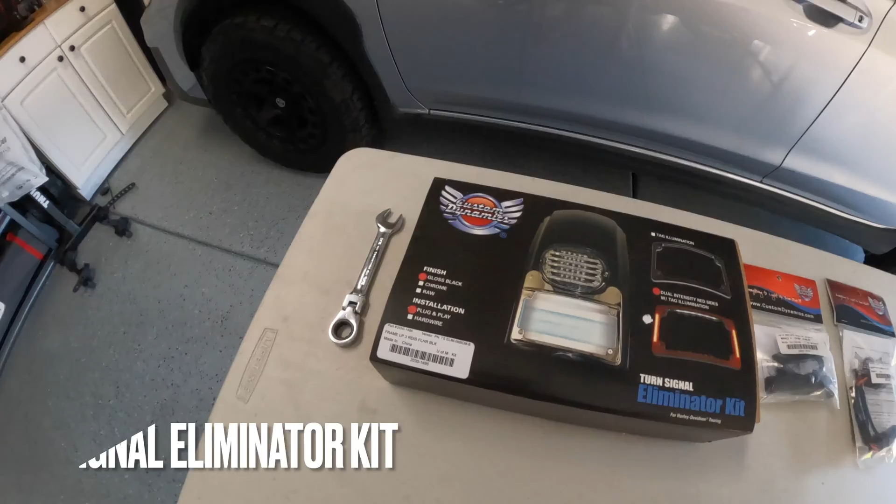This kit includes the frame, 6 white LEDs for plate illumination, plus turn, run, and brake functionality. It comes in gloss black and utilizes stock bolt holes for mounting. All the hardware is included, plus an LED lifetime warranty, which is pretty great.

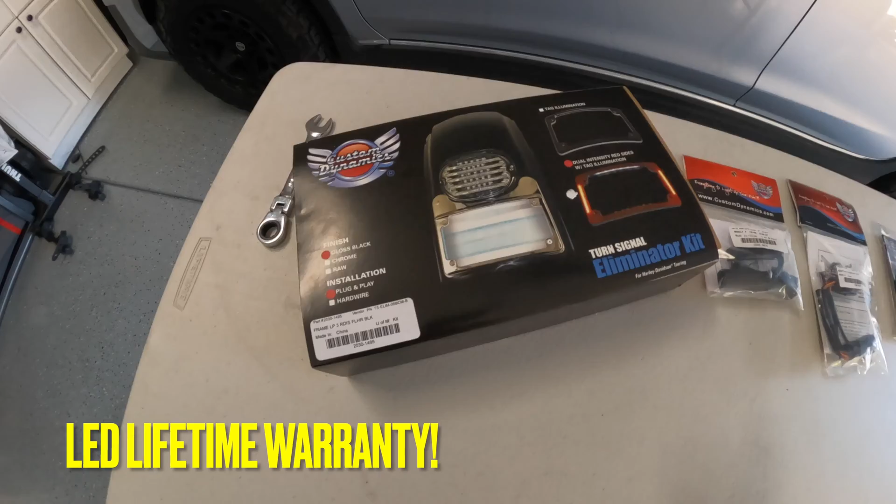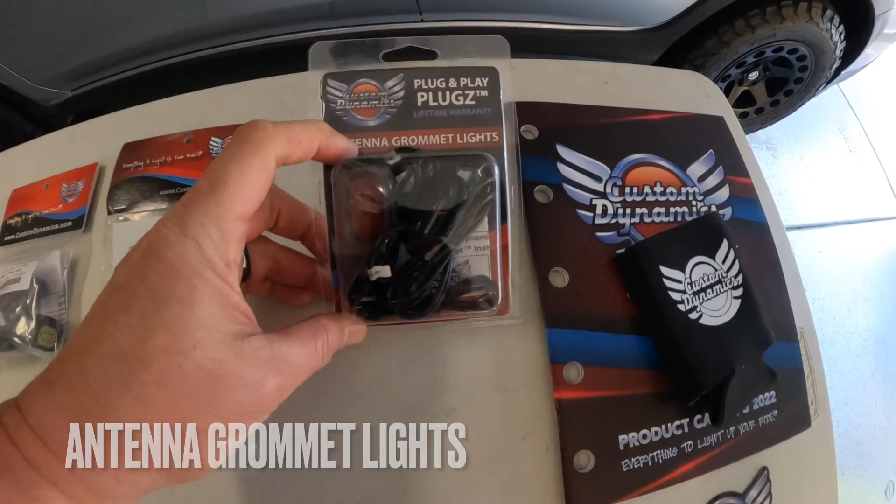To make this kit work, we have to buy a load adapter, and a run, brake, turn adapter. I also have the antenna grommet lights, which actually fit into the antenna holes in the rear fascia, hanging on either side of the rear fender. You just take out the stock rubber plugs, and those lights fit right into those holes. That should be a real nice clean look. I'm looking forward to seeing how it works out.

Here's a shot of the stock turn signal bar, and for comparison purposes we'll do some lighting tests so you can see. These aren't stock bulbs - I actually replaced these with aftermarket Custom Dynamics bulbs. Very bright, very effective, but we're gonna get rid of them in favor of a new setup.

In the interest of time, I'll speed up the unboxing process. Basically what we have inside the box is the turn signal eliminator backplate, the BCM-Y harness, the license plate frame with mounting screws included, mounting bolts, and a bunch of zip ties.

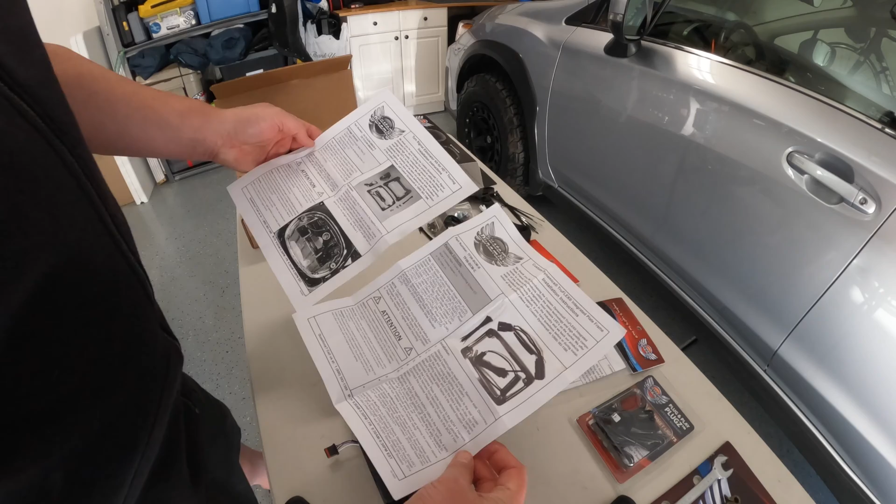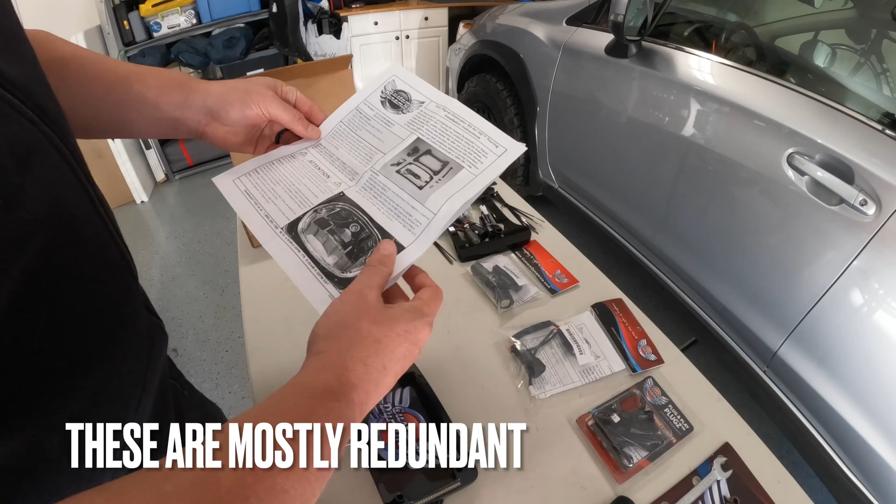With all of the parts included on the table in front of you, I have no less than 5 pages of instructions. So if I can, I'll try to break this down for you guys and make it a lot easier in case you want to do a similar setup for your bike.

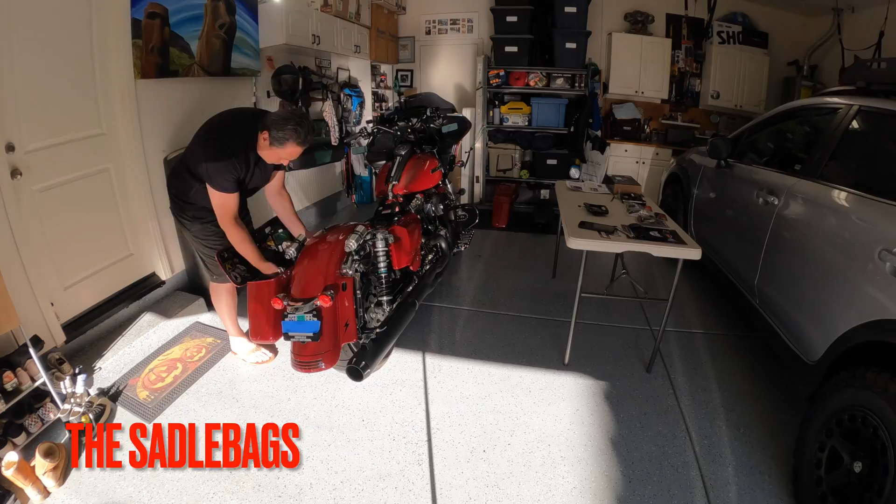For step 1, we're going to remove the seat, the saddlebags, and the side covers. For the next part of step 1, we're going to disconnect the negative battery cable from the battery. It's a little tough to get to because there's a lot of stuff stacked on top of it.

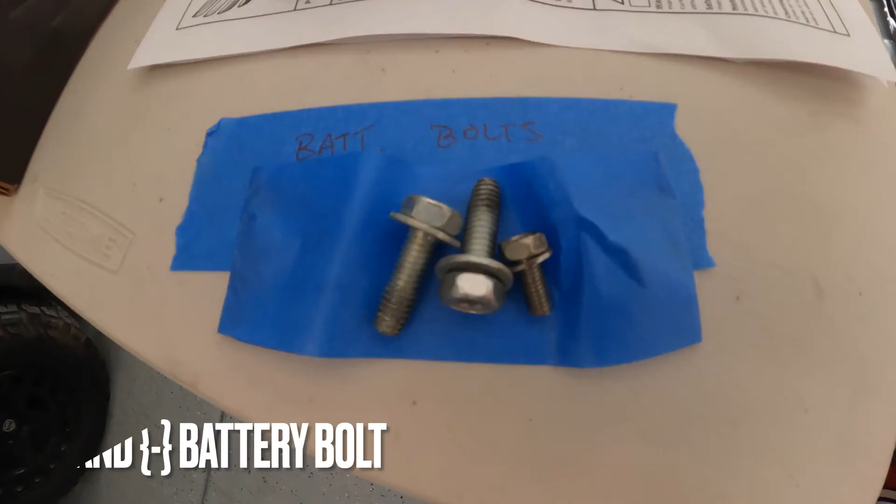Step 2: remove 2 screws on either side of the taillight, unplug the taillight connector from the taillight base, and remove the taillight.

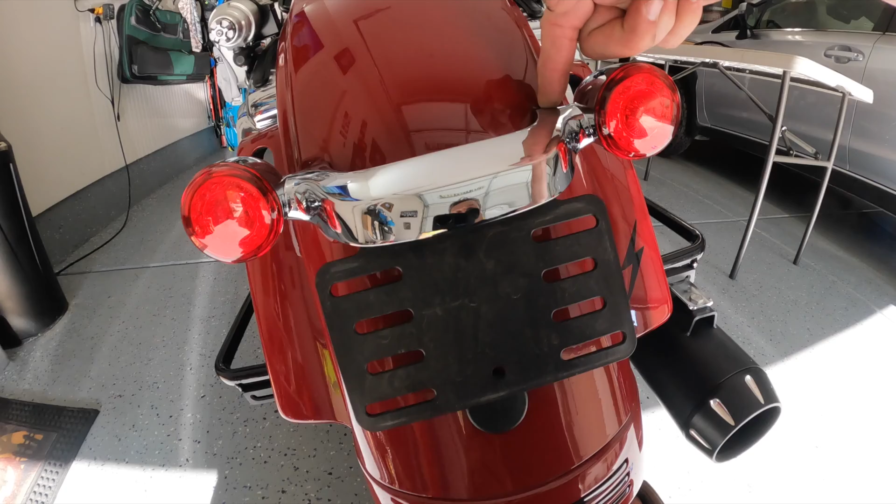There's 2 bolts holding the turn signal bar onto the fender, and there's about that much space between the rear tire and the fender. You've got to get your hand all the way up there with a wrench to undo it. Let's see if we can't get those off.

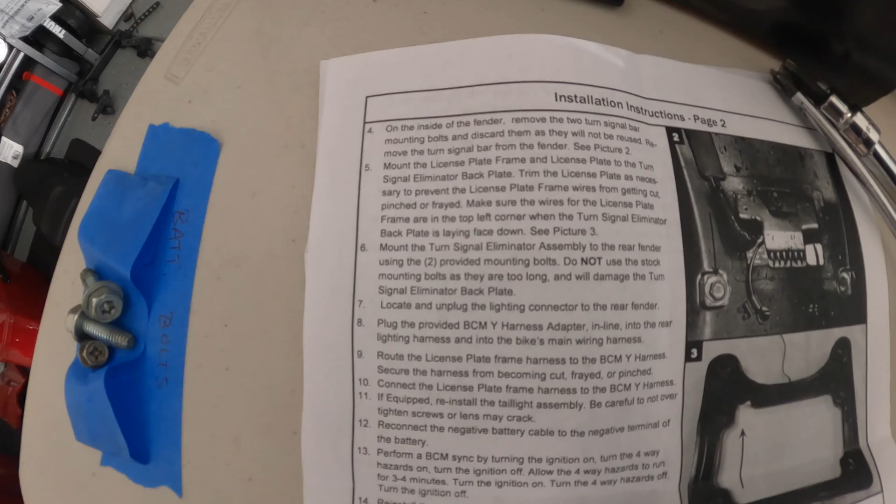All right, skipping to step number 4. On the inside of the fender, remove the 2 turn signal bar mounting bolts and discard them, as they will not be reused. I don't have a lot of range of motion with my hand in between the fender and the wheel, so we're just going to have to do a bunch of small turns. There she comes.

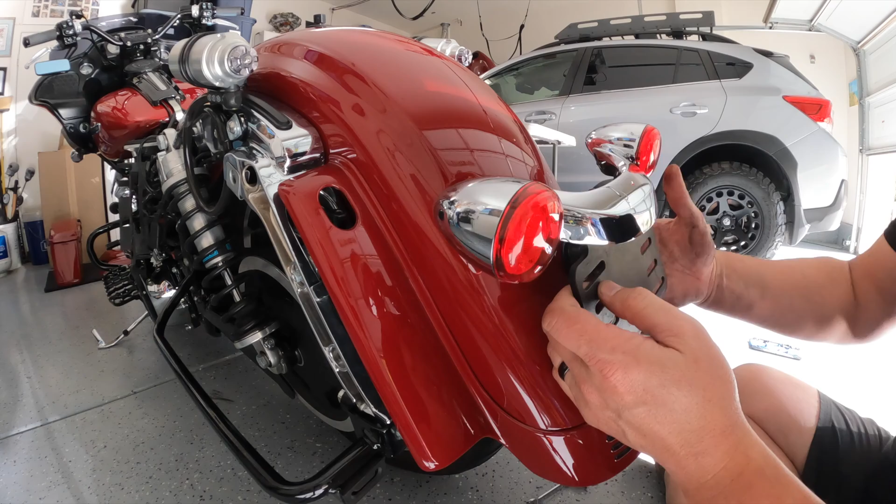Now we got those 2 bolts off, and it's now off. I just have to disconnect the electrical. I'm going to clean this up - I already like it better. So we're underneath the fender, let me get a little shot of what it looks like.

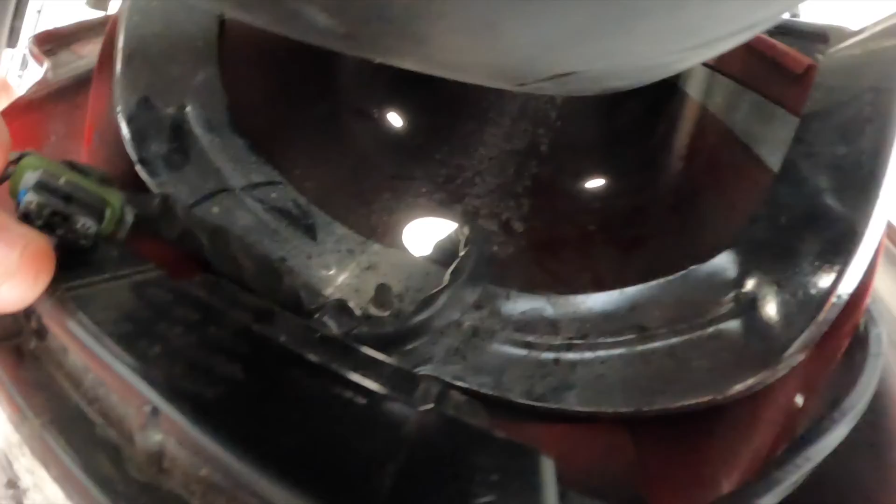This is the wiring harness that comes out from under the fender and connects to the turn signal bar. I just unplugged it with this connector here, but it's still kept in place with this bolt. The wire is managed up against the fender so it doesn't hit the wheel, so we've got to get that off too.

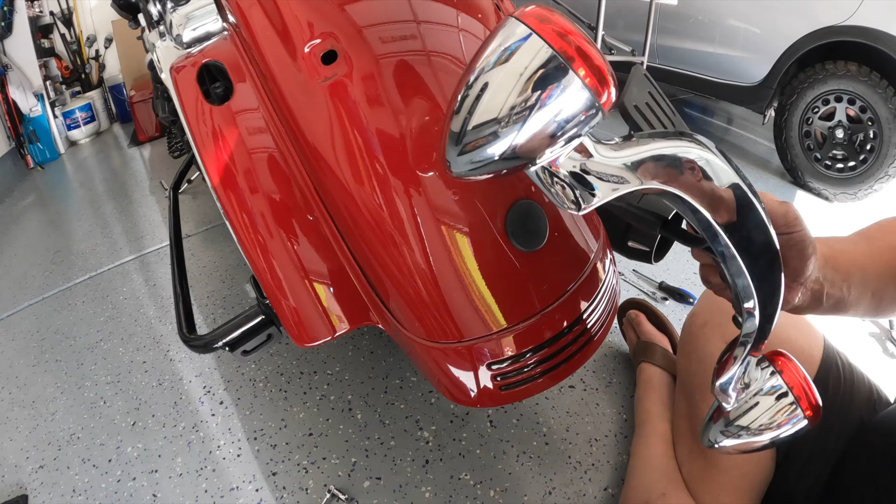This little bolt was kind of a pain to get to because there's just no room back there. It's a 7/16 bolt, and now that that's off, this guy's free. Don't scratch my paint, don't scratch my paint, don't scratch my paint. And there we go, it's out.

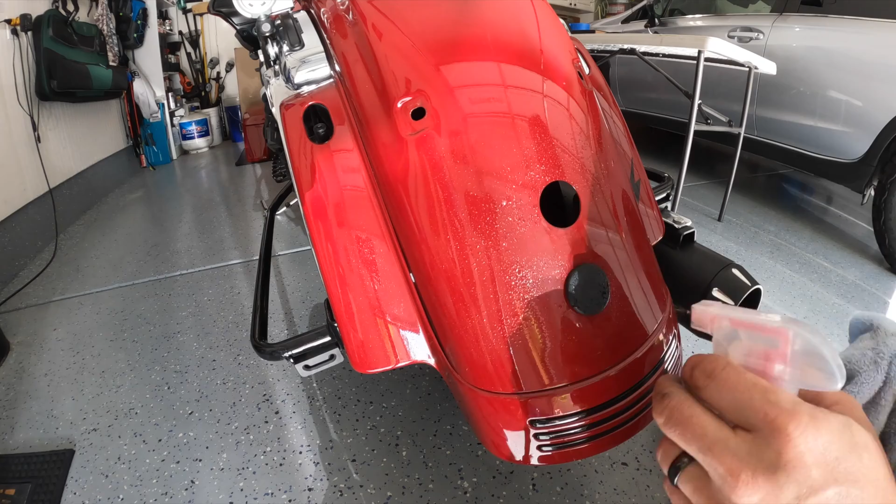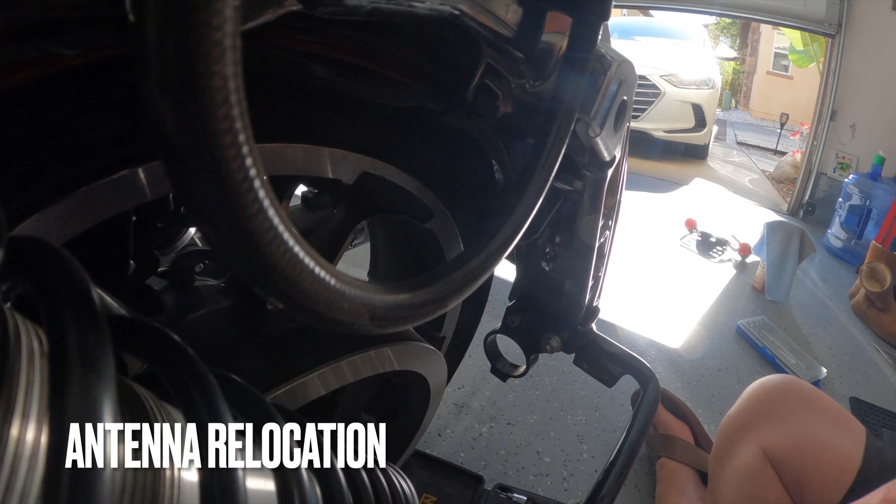A little dirty - I'm not gonna rub the dirt into my paint, I'm just gonna lightly wipe it off. Nice and clean. So the next thing I'm gonna do before I continue on with the instructions is figure out what I'm gonna do with this antenna.

This is the antenna mount. It's held on by a 3/16 Allen head bolt. I don't really listen to the radio all that much, but I kind of don't want to lose the functionality of it. I think a lot of guys who do this turn signal delete just plug it, but I don't think I want to do that. I'm not really sure yet how I'm going to reposition this, but let's see what's possible.

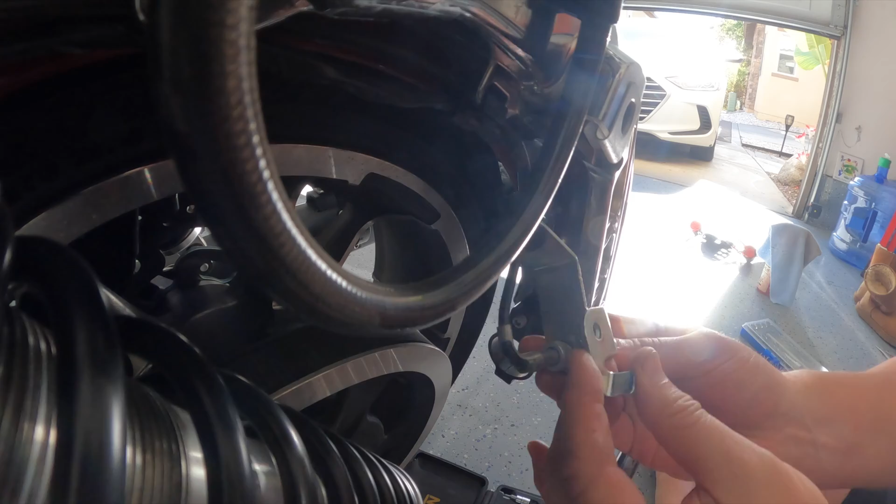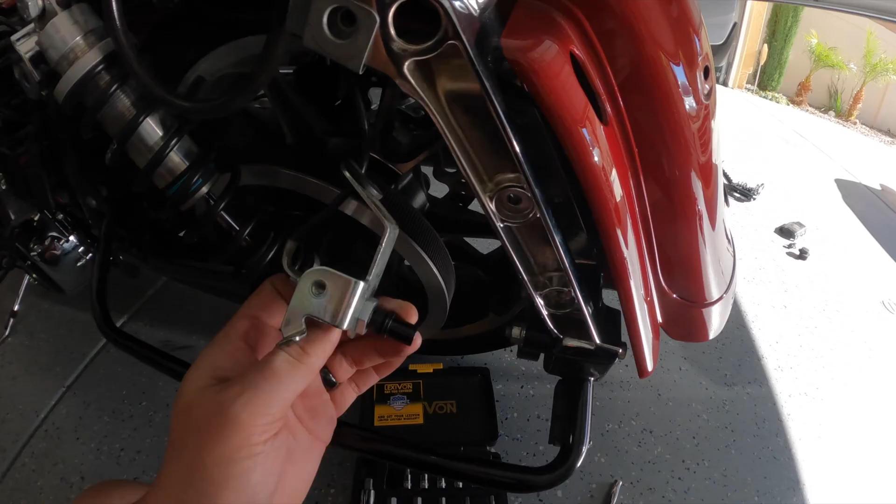There he is. I wonder if I just flip it, because I'm going to need this space here for my grommet light, and I need all that room behind it to mount the wires and the light housing. Obviously I don't want it near the pulley or the wheel. Let's see what we can do here. Okay, I think we're done - all I did was flip it around.

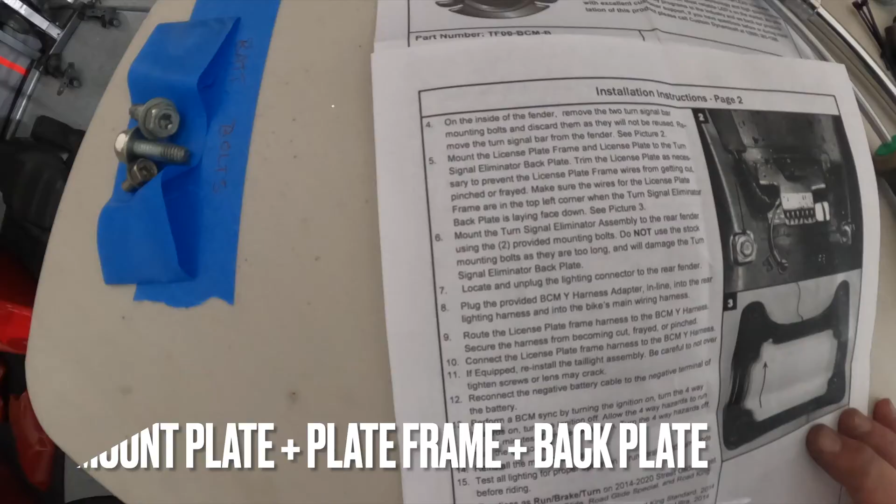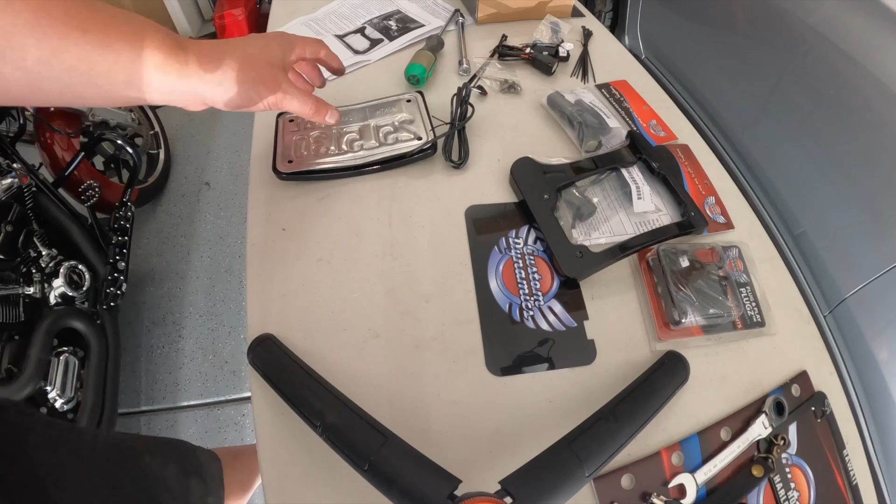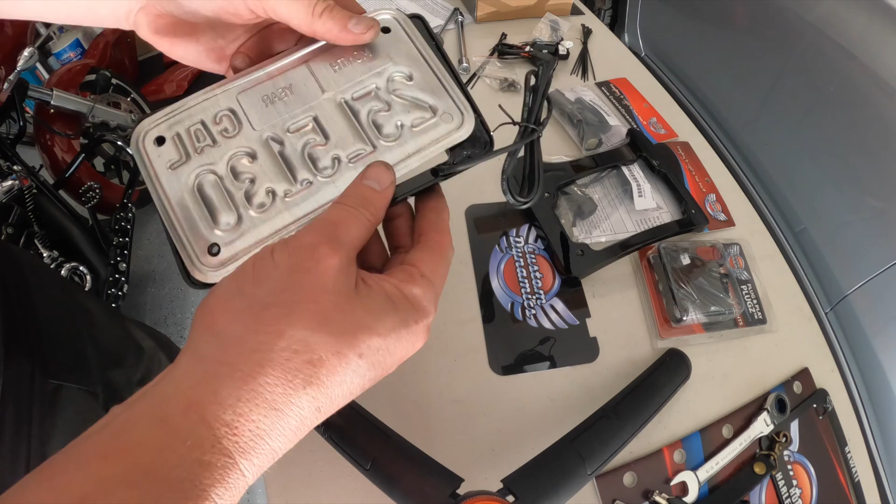Step 5: Mount the license plate frame and license plate to the turn signal eliminator back plate. Trim the license plate as necessary to prevent the license plate wires from getting out. So it does say to trim the plate, because I don't want the sharp edge of the plate to have friction up against that wire half hole right there, so that the plate can fit in there flush.

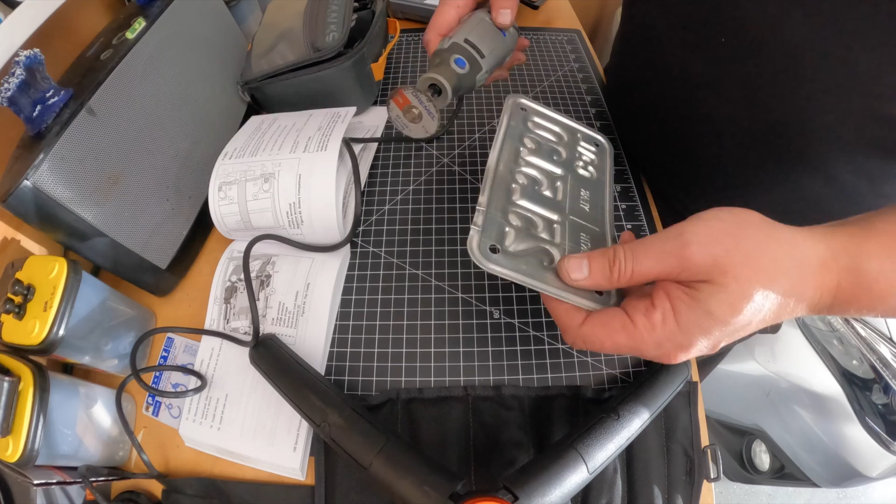Okay, got my protective eyewear. I'm just going to trim off a little piece of this plate, and bend this 90 degrees to make it a little easier to cut.

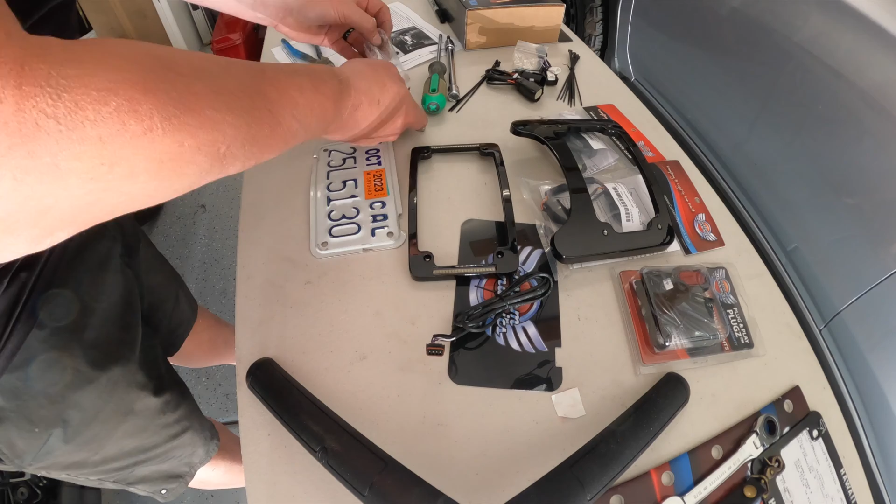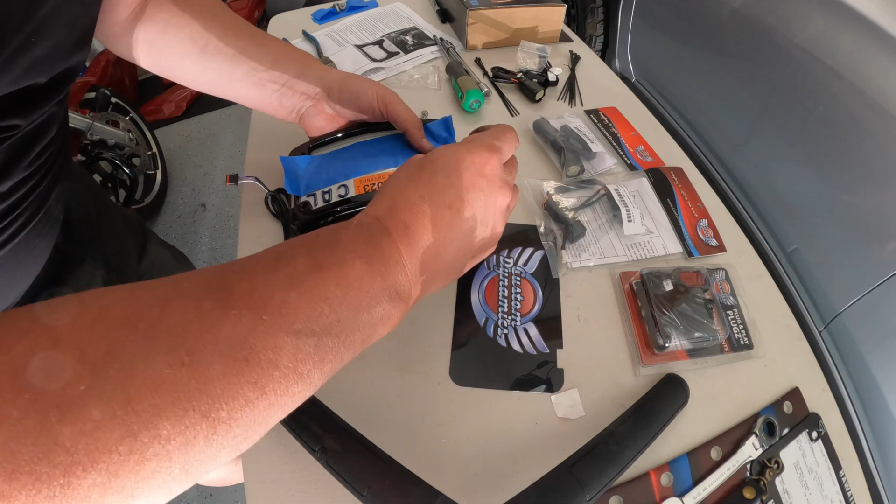So we got some hardware in here. Sand it down a little bit so it doesn't pinch or even touch the wire, so that should be okay. There we go. This gloss paint scratches super easy on anything on a Harley, I found - you just look at it wrong and it scratches. And there we have it.

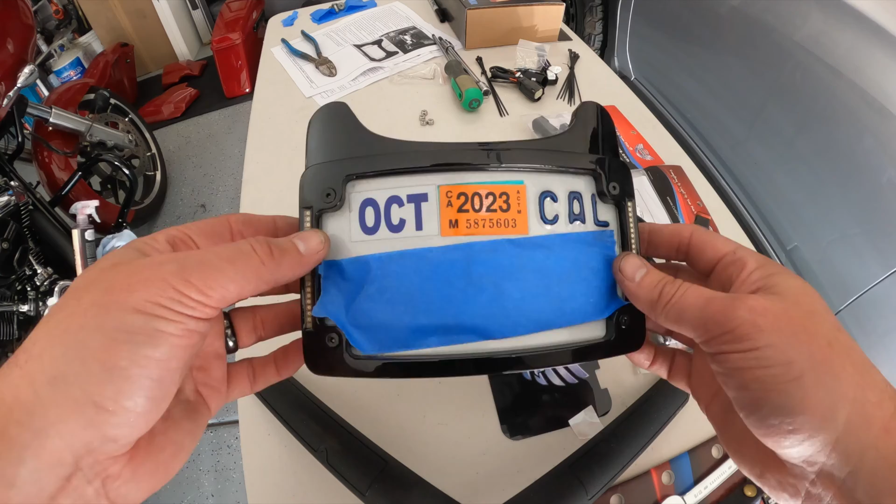So you got the plate inside the plate frame, attached to the backing plate. Looks real nice. Got the beautiful LEDs on either side, and then another row of LEDs - you can see that is unobstructed.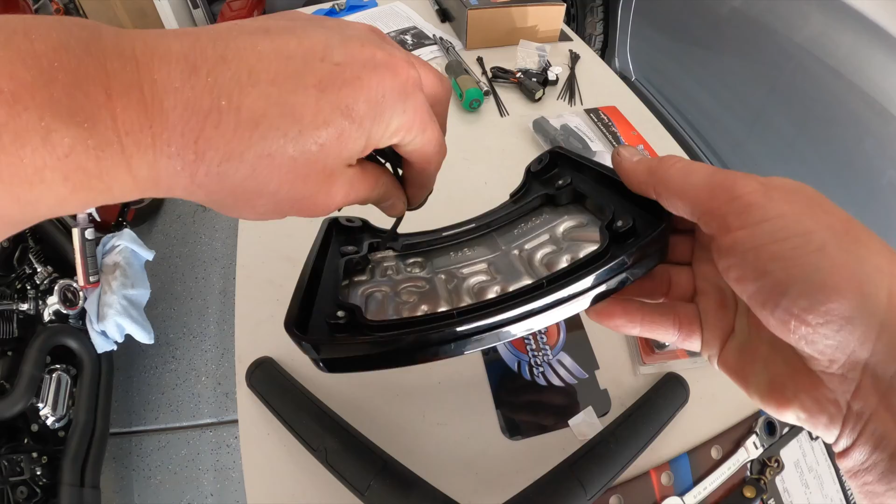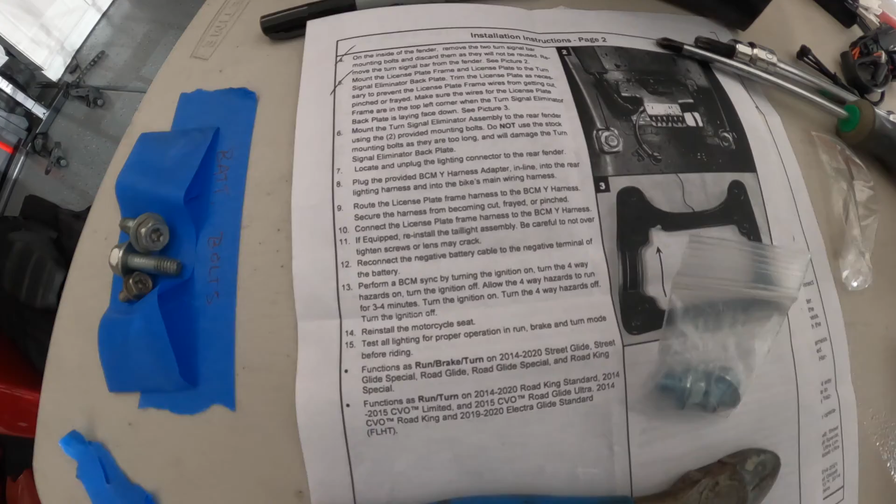Step 6: Mount the turn signal eliminator assembly to the rear fender using the 2 provided mounting bolts. Do not use the stock mounting bolts as they are too long and will damage the turn signal eliminator back plate. Let's start figuring out all this wiring.

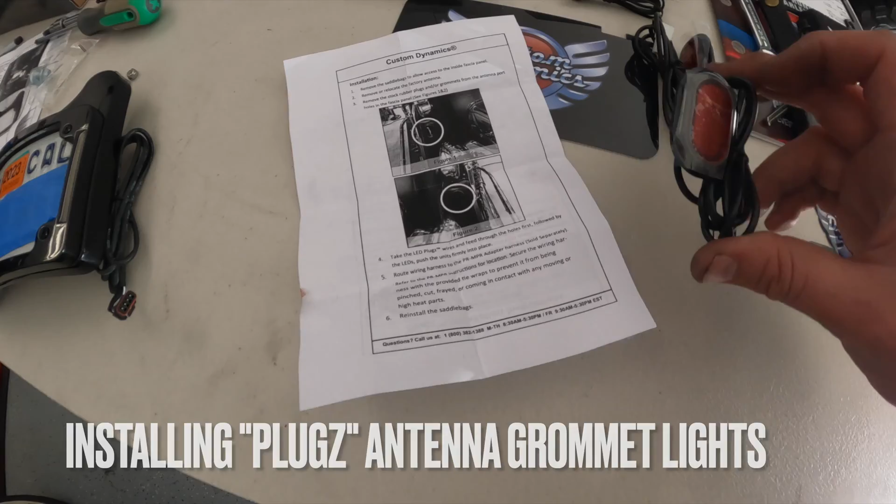Okay, so next I'm going to start installing these little grommet lights. I'm going to feed this through. But basically these just kind of pop in, and that's really all there is holding it in there - it's just a rubber gasket. Just make sure it's sealed all the way around.

Do the other side. Those are both plugged in, and I just love how that looks - to me it's just a much cleaner look. Now that I've got the bolts started, I'm going to tighten them up. Oh, this is fun.

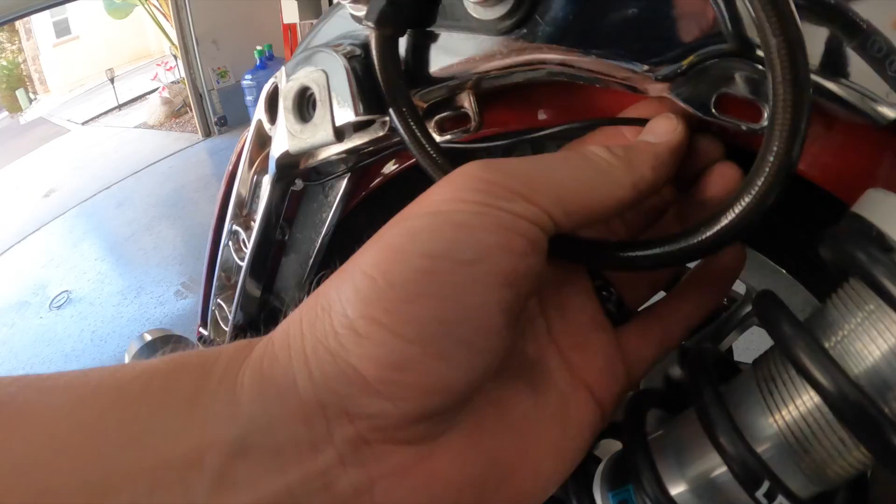Okay, now that the frame is mounted and the grommet lights are mounted, I'm just kind of running it from behind here. I guess I'll zip one there, maybe one here, keeping it well out of the way of any moving parts, and another one there, then feed it up here. I've still got plenty of slack, as you can see, and I'm going to organize that and squeeze it under the seat somehow.

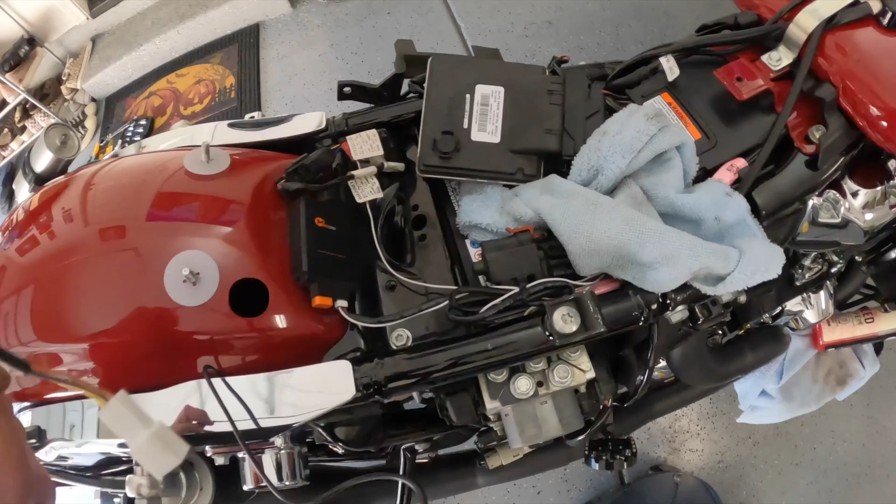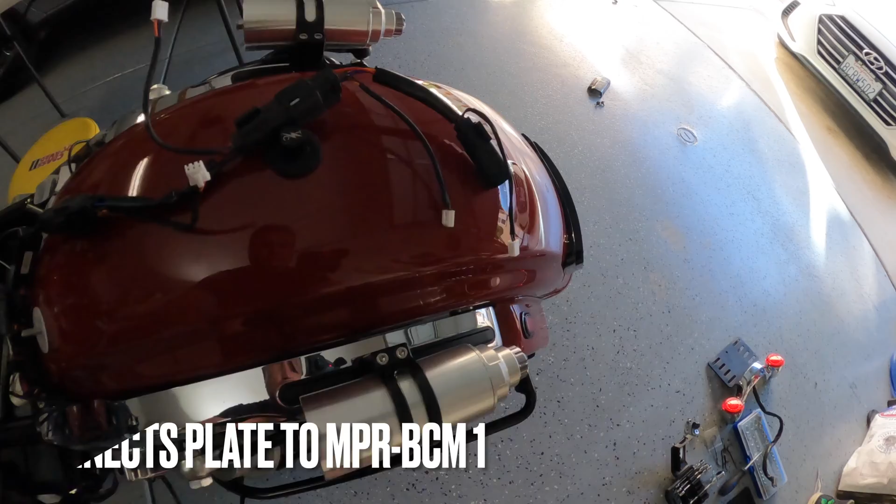So the instructions aren't super clear about which plug or adapter this is supposed to go into. I'm giving it my best guess, but I plugged it in. I got to plug in the rest of these - this guy into this guy, this guy into this guy, and this guy back into the bike. And I matched the purple rear wire.

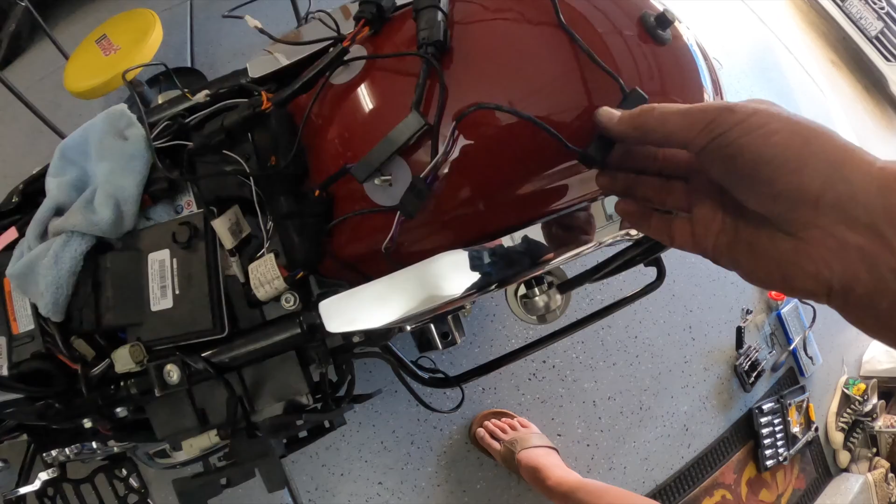This is the voltage regulator, and then I matched purple to purple, brown to brown for the 2 turn signals and the 2 grommet lights.

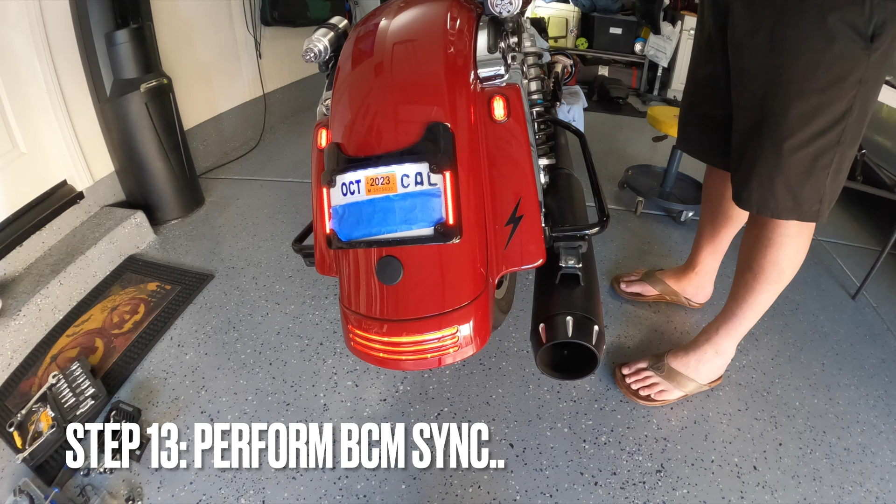Perform a BCM sync by turning the ignition on, turn the 4-way hazards on, turn the ignition on, then turn the ignition off. Hazards run for 3 to 4 minutes to get synchronized.

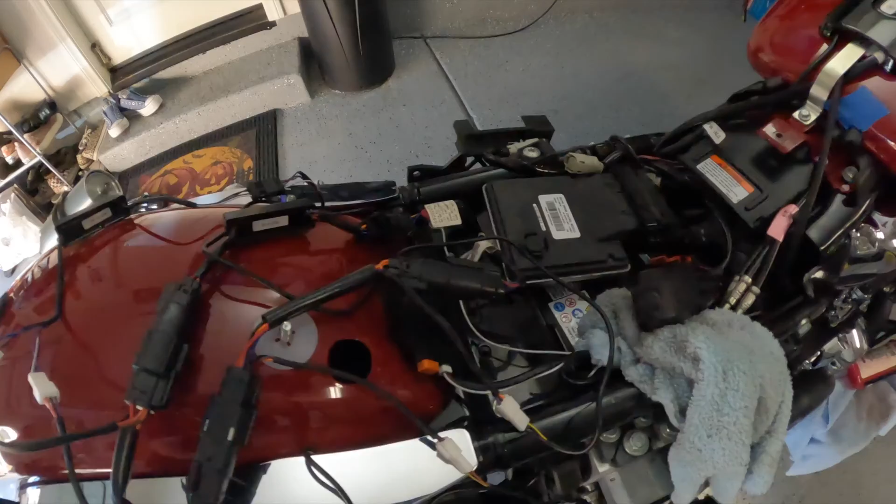Alright, so now that it works, I gotta get all this cleaned up and tuck it all back away nice and neatly. Et voila - that's as tidy as I'm gonna make it.

Woohoo! I like it, I like it!

Now I know that there's some keyboard warriors out there from the Road Glide forum who are going to tell me, yeah, but it's not safe, you can't see, it's not as bright as the stock lights - and it's a subjective choice, everyone can do what they like. I think you can see pretty darn well.

And if I move over to the quarter, if I do have a vehicle in my rear right third quarter, I'll try to be more mindful of being careful when in heavy traffic, changing lanes and whatnot.